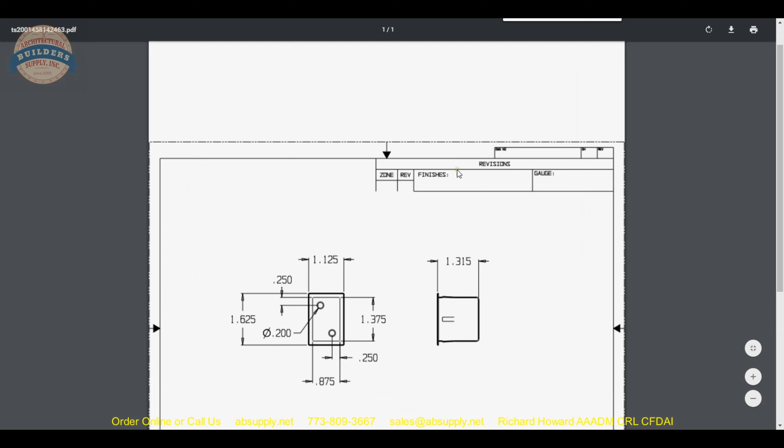Now let's switch to the screen view and take a look at the template, and we'll also look at the product catalog that's there as well. Now this is the product that we're looking at. The CP stands for chrome plated. Here's our template, and as we pull that up, you can see they give us those dimensions that we have all but verified. Okay, locations for the holes, TS-100. That's the technical drawing of the item. Now, the product catalog, and that's handy because that will allow us to review all of the sister products as it pertains to Don-Jo strikes.

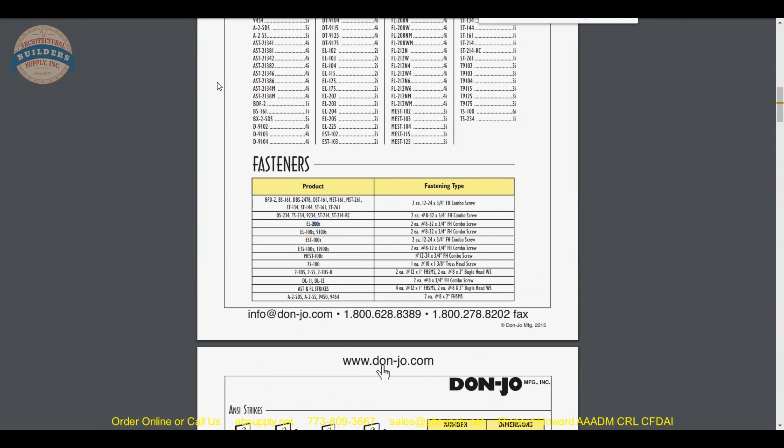Okay, now this product catalog is handy because it will allow you to go through all of that. And what's interesting is they don't have this square thimble strike in this version of this catalog. And I've hopped over to the manufacturer's site, and they don't have anything listed here either, unfortunately. Strike plates. Oh, there it is. Okay, so yeah, they've got a photograph of it. They have what would be a cut sheet, and then the template, which we've already looked at.

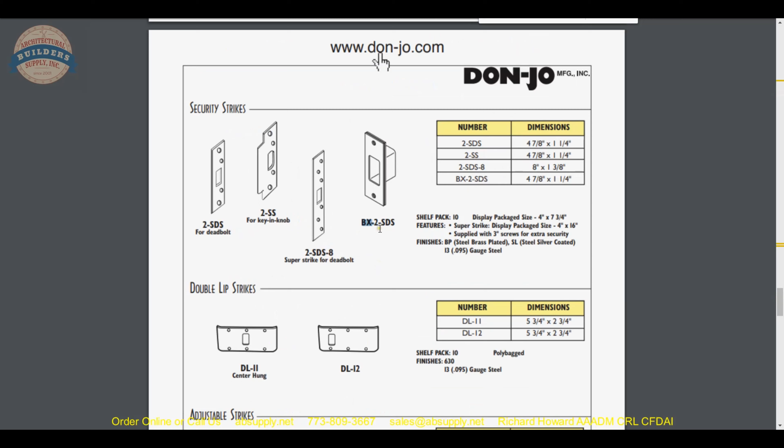There is another strike that I wanted to show you, and that will be in the product catalog. And that's the BX-2 SDS. This is a very common optional strike. This is a much more robust strike with an armored front construction. Okay, exterior plate with an armor backing, an integral dust box. That BX-2 SDS, that's a common strike. We go through spurts of selling that often, and here's what it looks like. Okay, so that's a not uncommon strike that you might want to be reviewing as well.

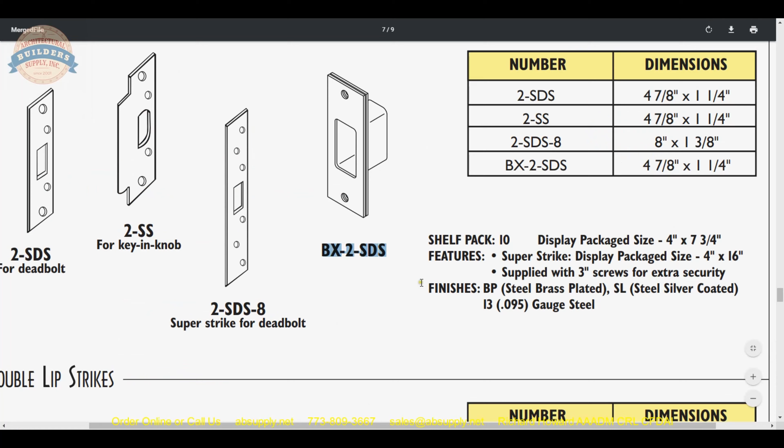Now, as we move back to our item here, back to the product catalog we were looking at, this is handy because you'll be able to review all of the strikes available from Don-Jo, and this thimble strike itself, this rectangular thimble, it's awfully nice because you have two choices with thimble strikes from the manufacturer.

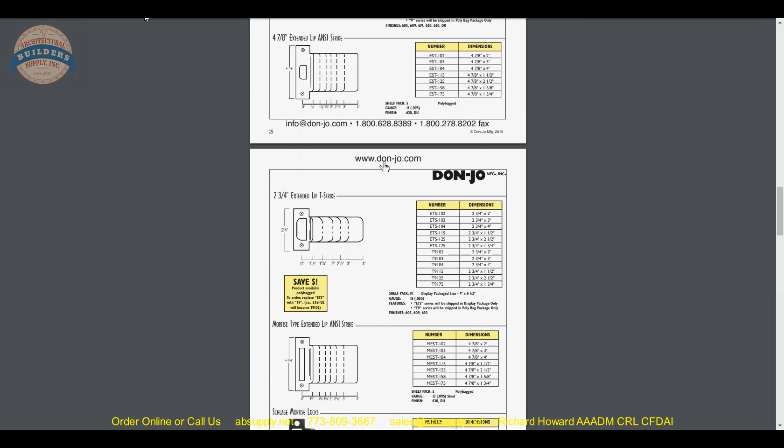And the other is, well, we can just look at it here, is this round thimble strike. And that works well too. I can tell you that the margin on this needs to be very accurate in terms of lining that up. I might like the rectangular a little bit more, only because it will allow you to use perhaps a much more heavy-duty, robust deadbolt, maybe something high security by Mul-T-Lock or others. And that thimble strike would really be for your standard caliber items.

Sorry, I keep clicking on that.

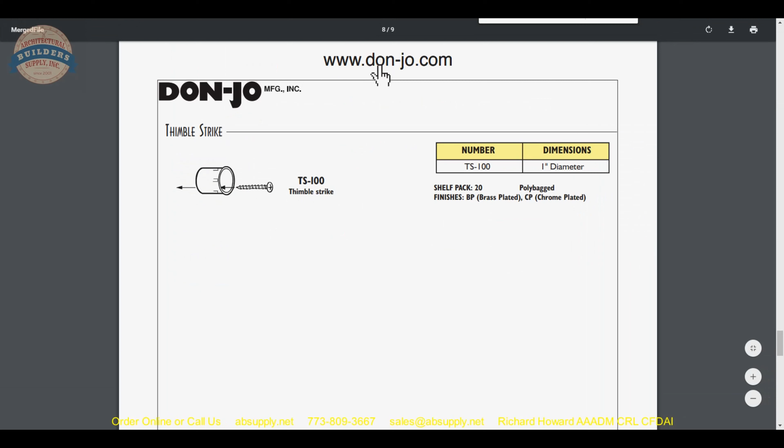Would be for your standard caliber items that we may not use in all instances. So be mindful, there are two options. Now let's switch back to the camera view, take the inside dimensions of this strike so you know what it is, and then we'll finish up this video.

Now the inside dimensions of this strike, let's get accurate with that. An inside width of the strike is 0.868. 0.868. Okay, so almost 7/8 of an inch wide. Overall height is going to be 1.41. 1.41, so basically 1 3/8 tall, and that will be adequate for a 1-inch tall bolt. Certainly allow that to be where you positioned it.

I would look to position the strike in the frame so that, follow me on this. This is for a deadbolt, not for a latch. Your door closes. Let's assume you have weather stripping. Your door closes and latches, and the door will have a tendency to relax a little bit, or bias away from the face of the weather stripping. Okay?

It would be good if you calculated in your head where you might marginally, like a 1/16 of an inch, relocate that lateral center line so that when you throw the deadbolt, because the door has relaxed, you don't want to hit the inside of this or the pull side elevation of that strike.